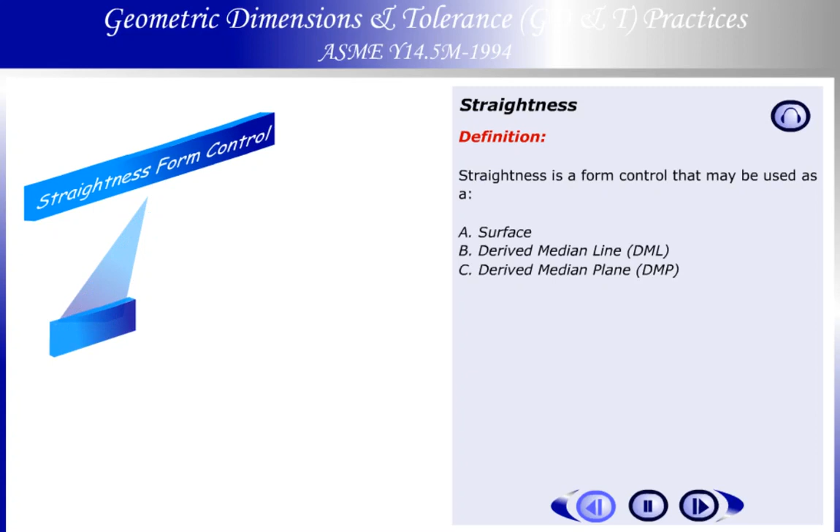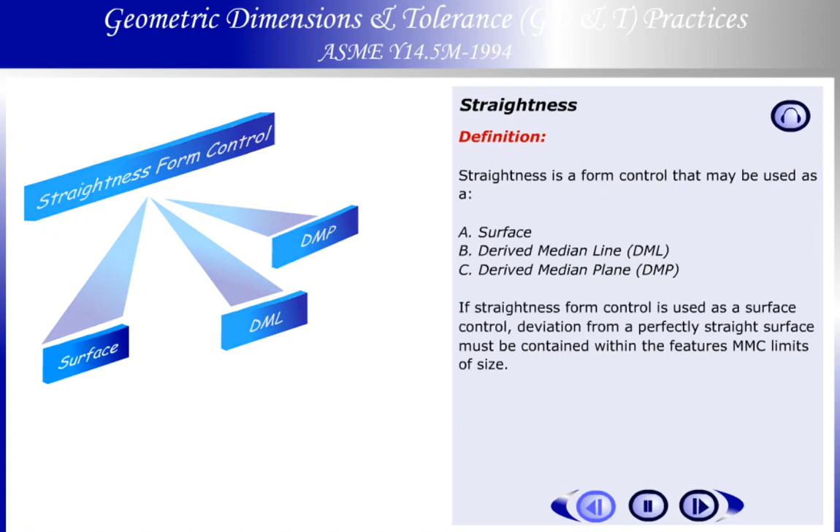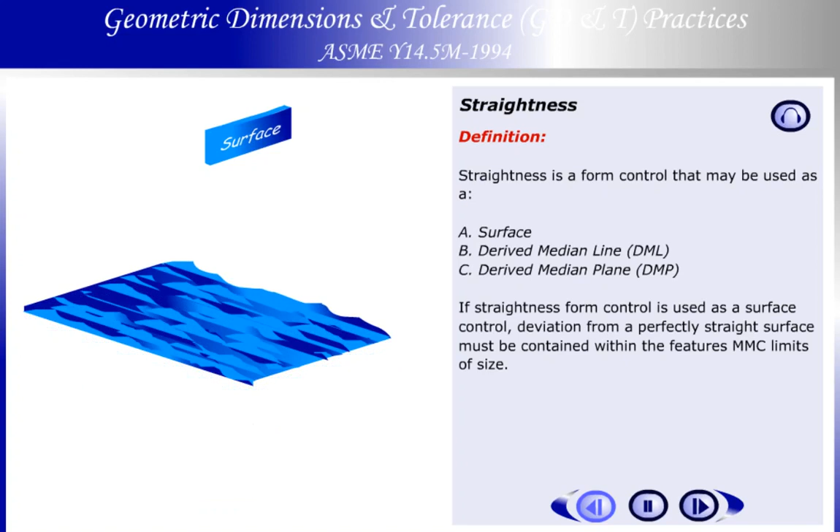Definition. Straightness is a form control that may be used as a surface, b. derived median line (DML), c. derived median plane (DMP). If straightness form control is used as a surface control, deviation from a perfectly straight surface must be contained within the feature's MMC limits of size. Surface straightness controls use only a straightness symbol and a geometric tolerance zone descriptor.

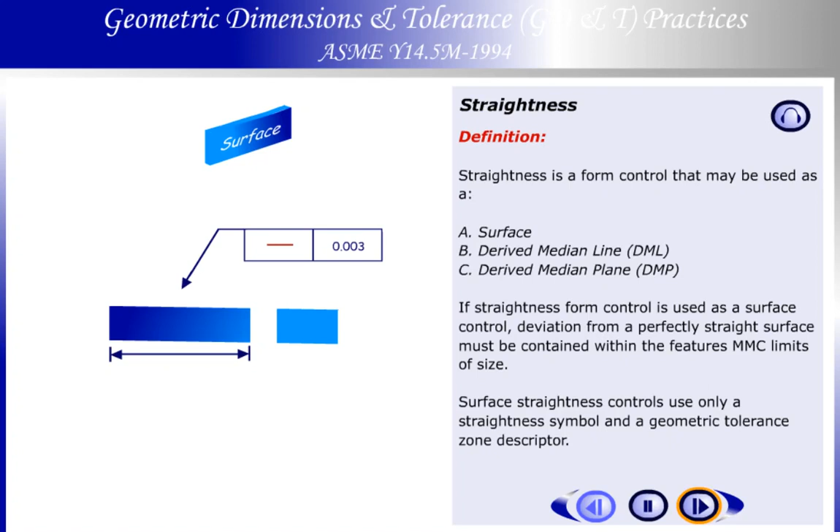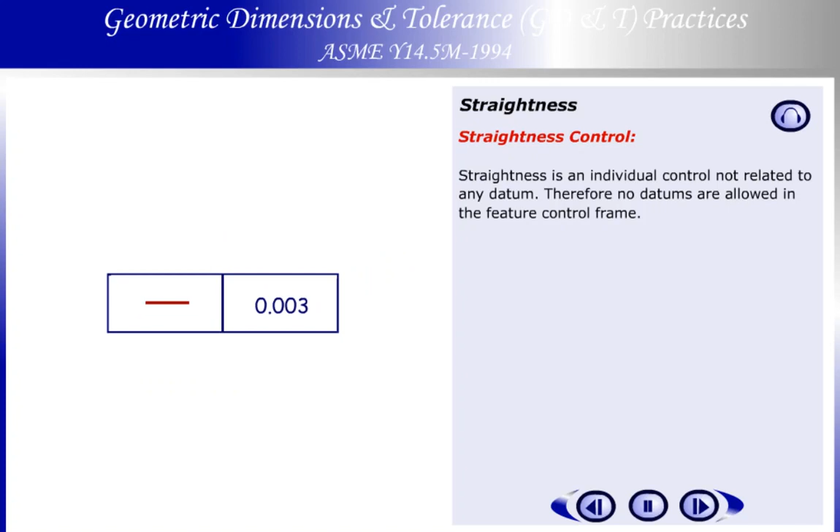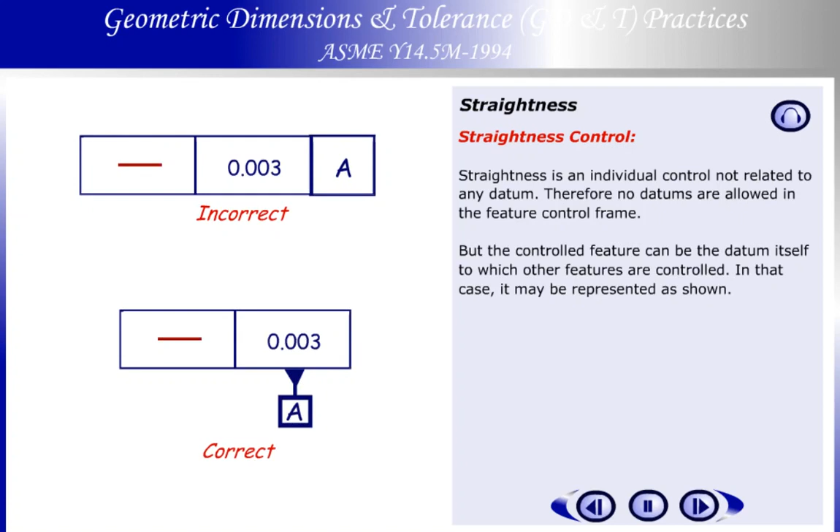Straightness control. Straightness is an individual control not related to any datum. Therefore, no datums are allowed in the feature control frame. But the controlled feature can be the datum itself to which other features are controlled. In that case, it may be represented as shown.

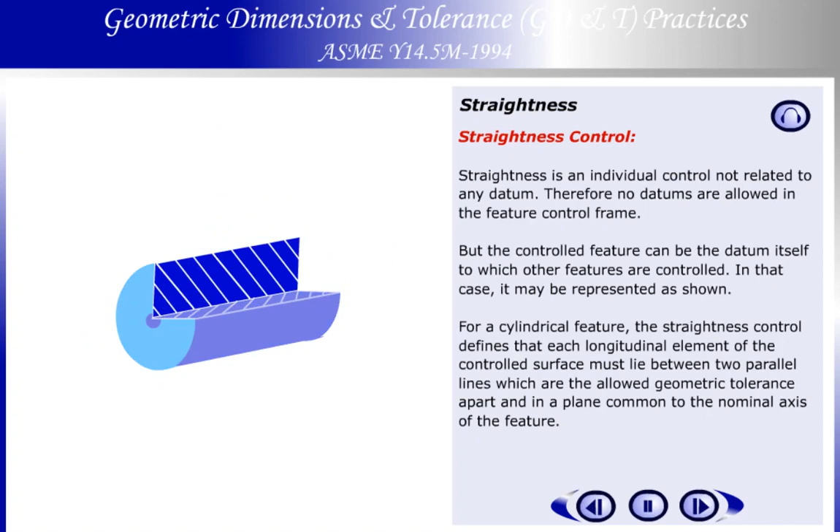For a cylindrical feature, the straightness control defines that each longitudinal element of the controlled surface must lie between two parallel lines which are the allowed geometric tolerance apart and in a plane common to the nominal axis of the feature.

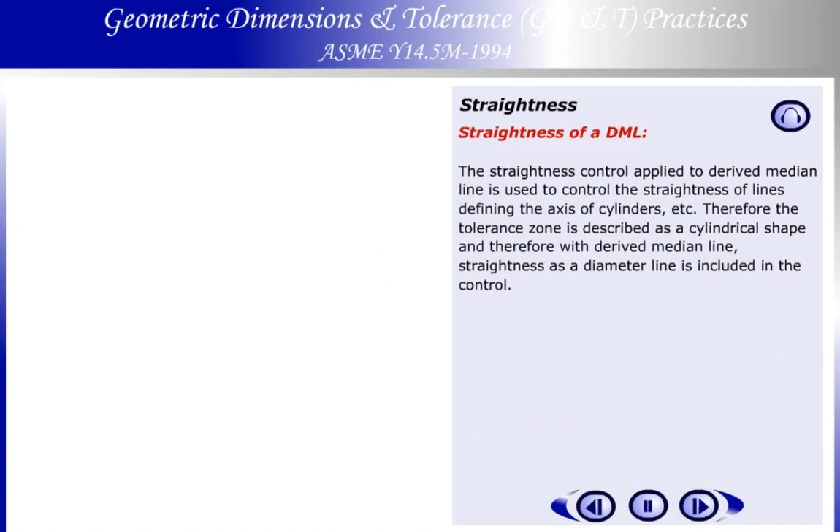Straightness of a derived median line. The straightness control applied to a derived median line is used to control the straightness of lines defining the axis of cylinders, etc. Therefore, the tolerance zone is described as a cylindrical shape, and therefore with derived median line straightness, a diameter symbol is included in the control.

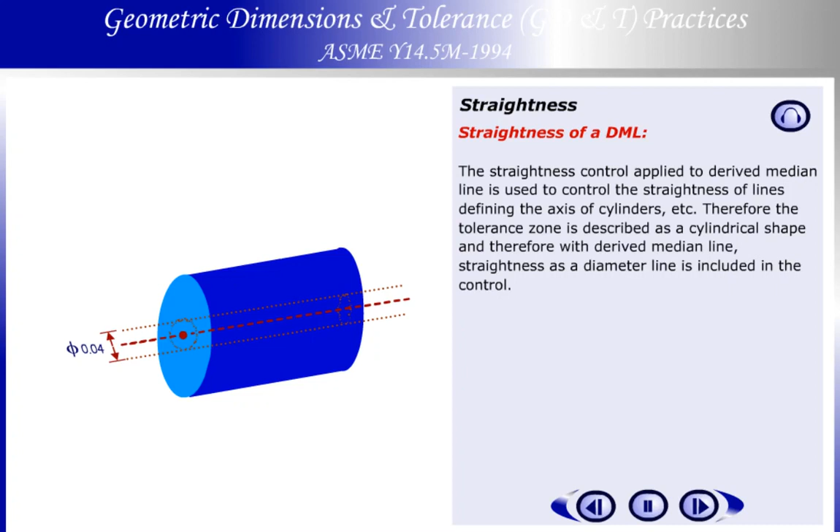When applied on an MMC basis, the maximum straightness tolerance applicable to the produced feature is the specified tolerance plus the amount the actual local size departs from MMC. As each produced local size departs from its MMC, an increase in the diameter of the straightness tolerance zone occurs that equals the amount of departure from MMC.

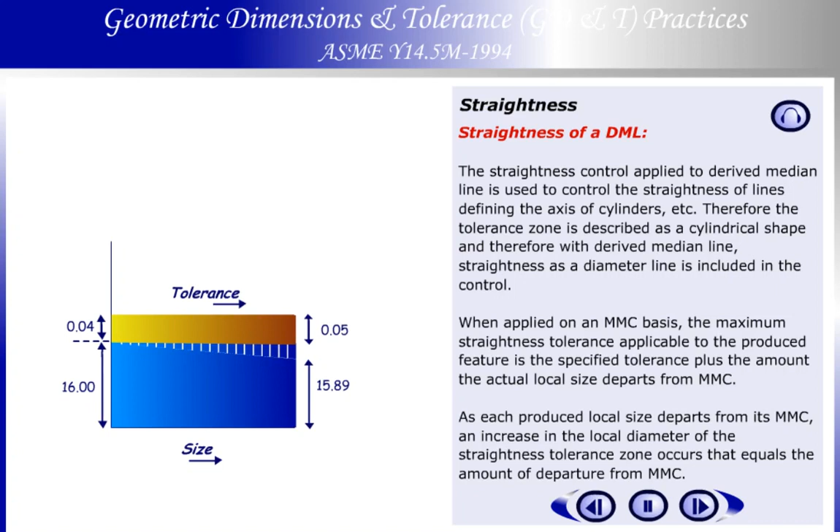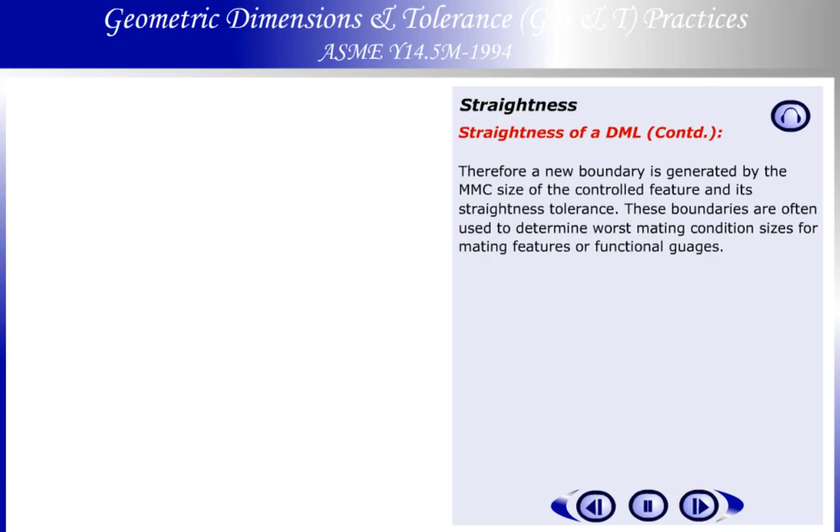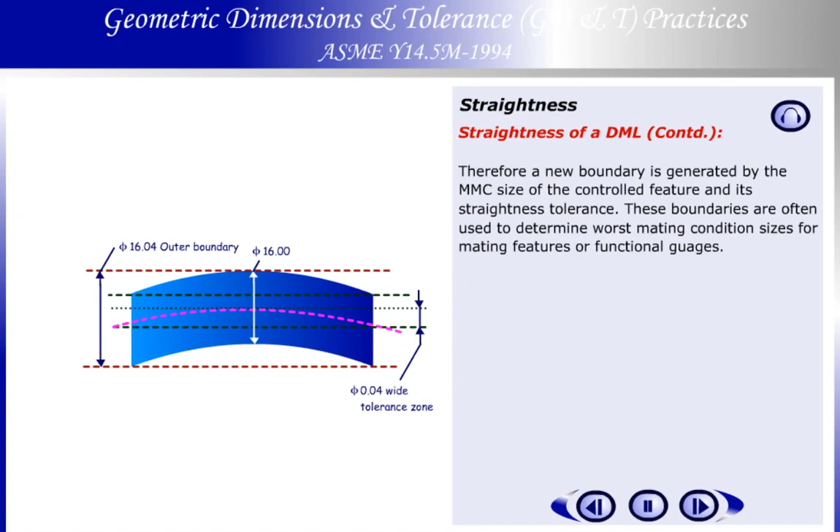Straightness of DML continued. Therefore, a new boundary is generated by the MMC size of the controlled feature and its straightness tolerance. These boundaries are often used to determine worst mating condition sizes for mating features or functional gauges. If the feature of size is controlled with the MMC material condition symbol, a gauge can be made to check the form. This gauge is called a functional gauge or receiver gauge.

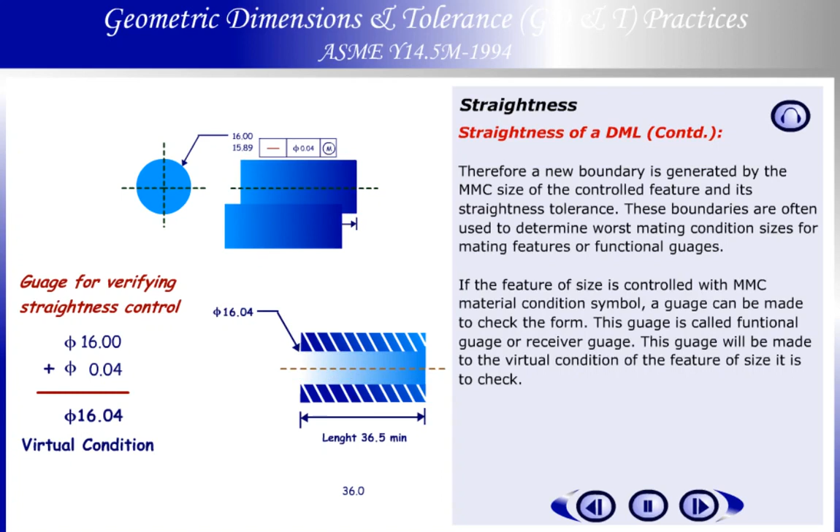This gauge will be made to the virtual condition of the feature of size it is to check. If the controlled feature is a male feature, shaft, tab, boss, etc., the receiver gauge will resemble its female counterpart in shape, hole, keyway, ring, slot, etc., and vice versa.

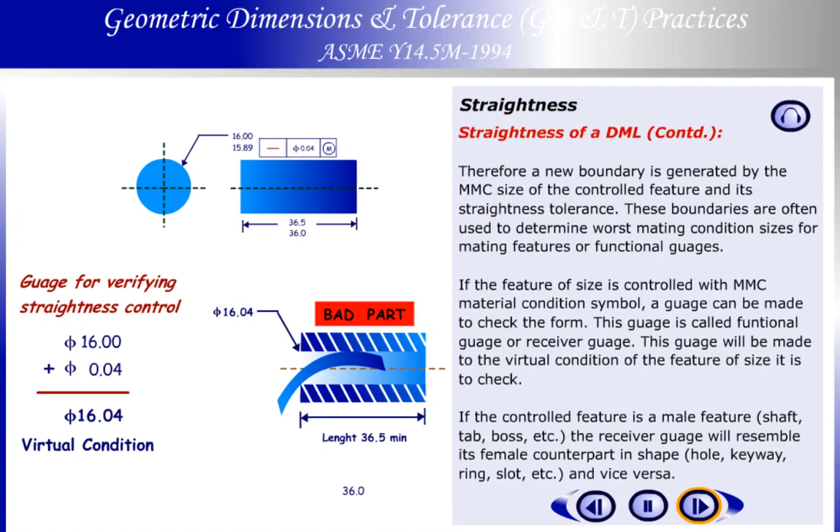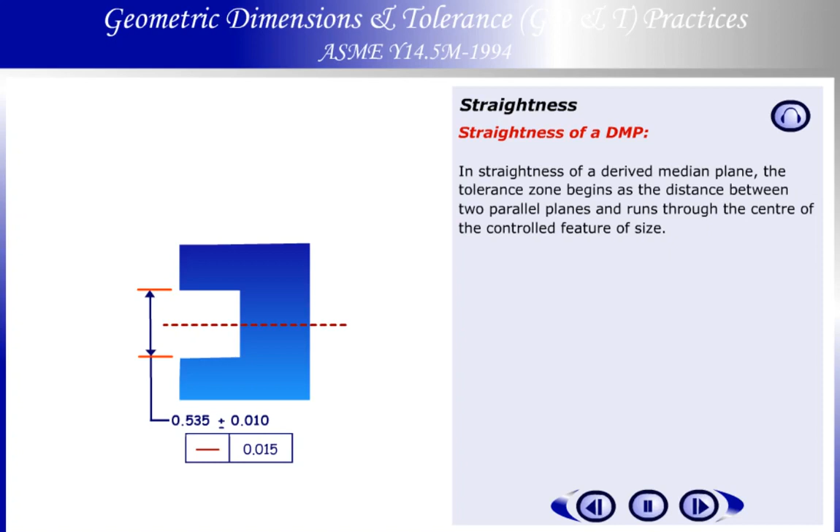Straightness of a derived median plane. In straightness of a derived median plane, the tolerance zone begins as the distance between two parallel planes and runs through the center of the controlled feature of size. The controlled feature's derived median plane as determined must lie within this tolerance zone.

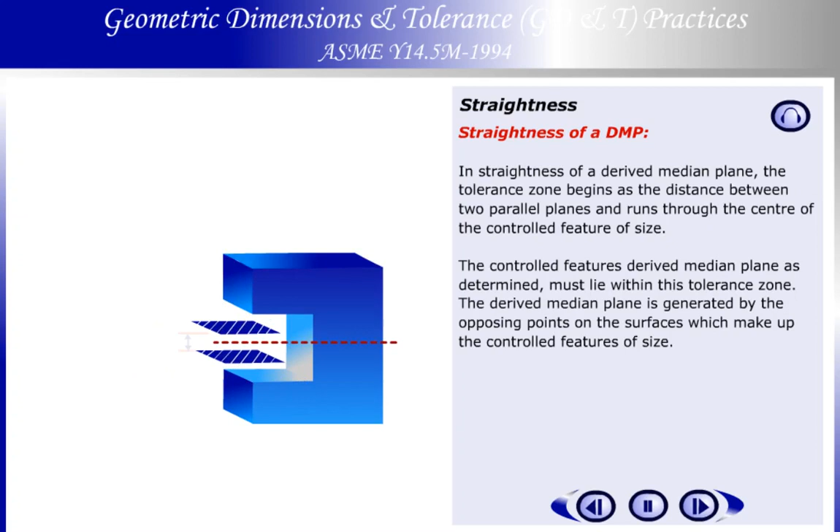The derived median plane is generated by the opposing points on the surfaces which make up the controlled feature of size. The derived median plane generated may bend, waffle, or distort in any way from a perfectly flat counterpart, but must never violate this tolerance zone of two parallel planes the distance apart allowed by the control.

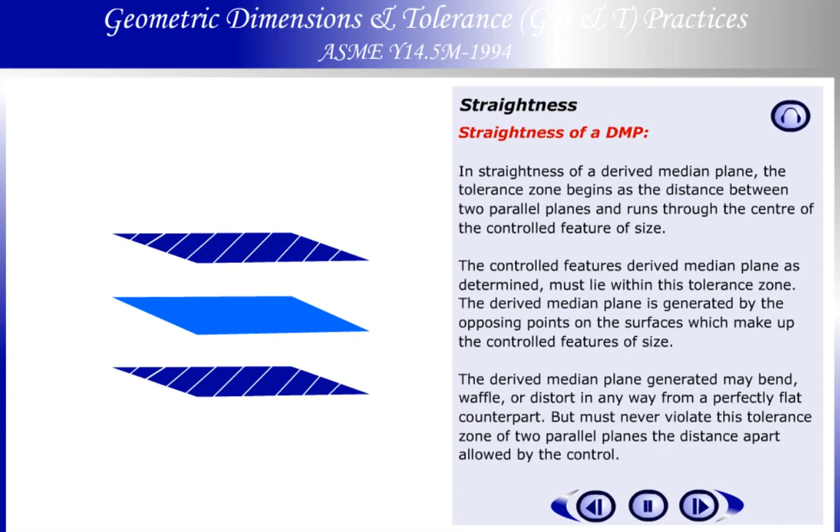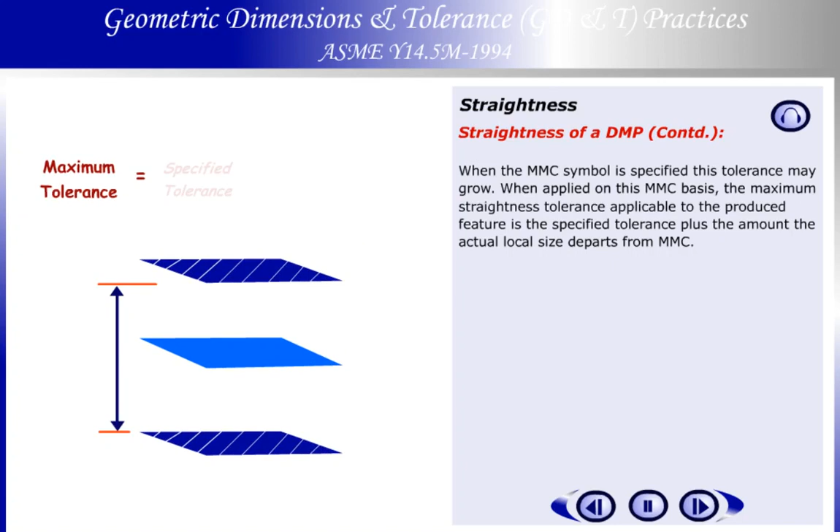Straightness of a DMP continued. When the MMC symbol is specified, this tolerance may grow. When applied on this MMC basis, the maximum straightness tolerance applicable to the produced feature is the specified tolerance plus the amount the actual local size departs from MMC.